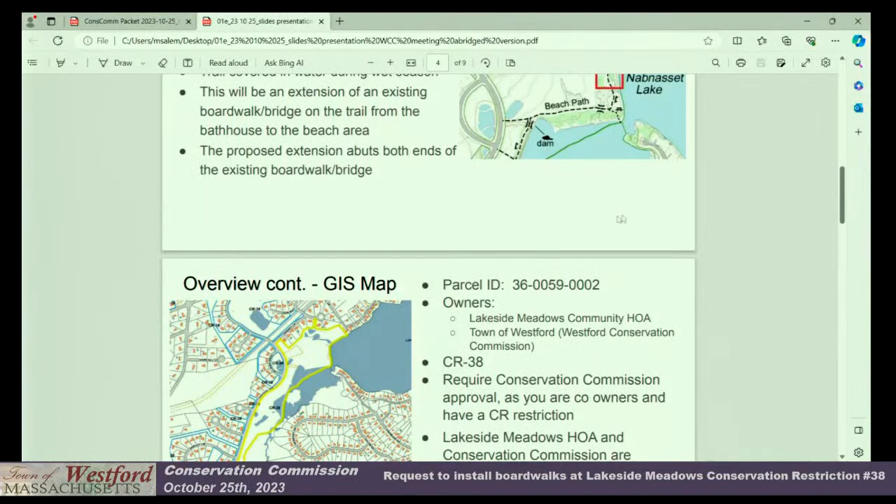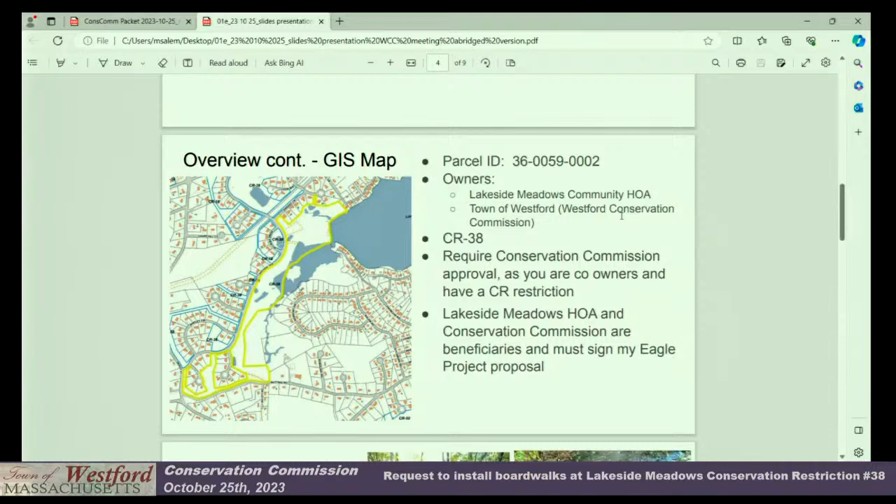Here is some information on the site. You see the parcel ID and the owners. Now I require Conservation Commission approval because you are co-owners and you have a CR restriction in place on this property. And so both yourselves and the Lakeside Meadows Homeowners Association must sign my Eagle project proposal in order for me to continue.

All right. And here's just a brief overview of the current damage to the trail. The boardwalk will help alleviate this. You can see bike ruts and footprints and other damage.

So just a brief design of the way the boardwalk is put together. So it's built on grade out of ground contact rated pressure treated lumber, 40 inches wide to satisfy those requirements regarding... why can't I think of the word? Accessibility. Yeah, accessibility requirements. Screws, and so it's designed to survive. I'm not going to go read every single thing. It's modular. It can be scaled up and down easily in the future.

The HOA has selected 110 feet of boardwalk, 108 feet if you do the math. And you can see the length of the boardwalk right here, 36 feet on the Birchwood Road side to the bridge, 72 feet from the bridge to beach.

A question that they had: the HOA desires the ability to upgrade to 300 feet in the future if they want to do that. Would it be possible to get like 300 feet signed off for the boardwalk, only build 100 feet now, and then in the near future build the next 200 feet or so afterwards? Or does it have to all be done in one go, or different permits for each expansion upgrade?

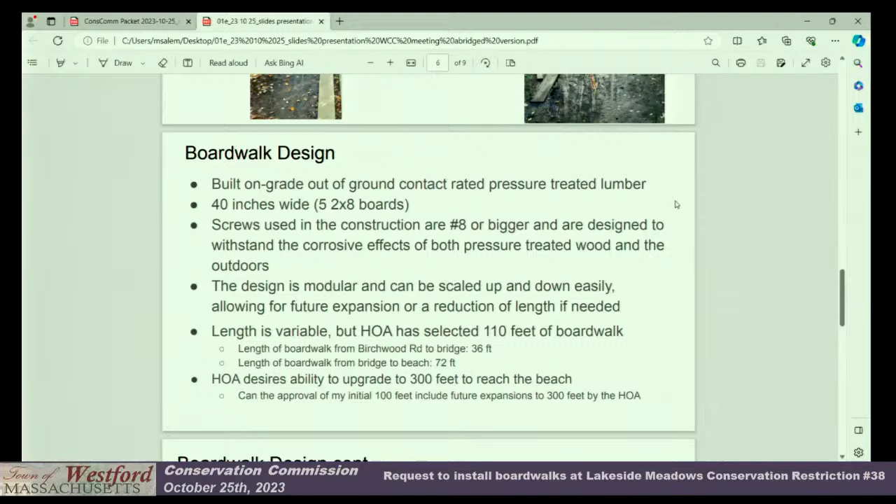I want to say we can. Let me just work through the logistics. I certainly think it should be doable. A phase one and a phase two? Yeah, and if the more southerly end of it gets expanded at a later date, we can accommodate it and make it work. Yeah. I think so, especially in terms of an order of conditions.

Again, this is kind of in a wet meadow. Not trying to avoid segmentation or anything, something like this, really? Yeah, we could, as long as it's constructed in a similar manner. Yeah. And it could be a phase two, and if it doesn't get acted upon within the validity of the order, it certainly could just be closed out. For the phase one, we could certainly issue a partial certificate of compliance for the work that was done.

We'd have the plans in with the package, and so if another scout comes in a couple of years and wants to extend another 100 feet or something, you could pass them the plans. Yep. Okay. Well, and would it actually be restricted to another scout? If the homeowners association wanted to, could somebody else? Yeah, and again, we can certainly craft an order of conditions and make sure we list appropriate parties so that, after phase one is done, the homeowners association can continue on.

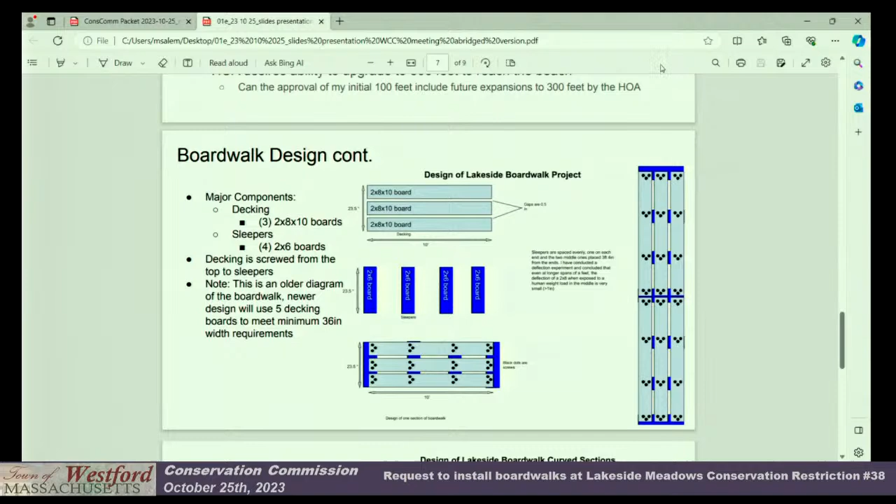Okay, so here's just another overview of the design. This is a slightly older drawing, so it uses only 3 of these 2x8x10s. The current design uses 5 of them. I just didn't update the drawing. So this just shows how the thing is put together. And yeah, I believe that's all on this slide. And then for curves, this is how it's put together. You just cut the decking at an angle.

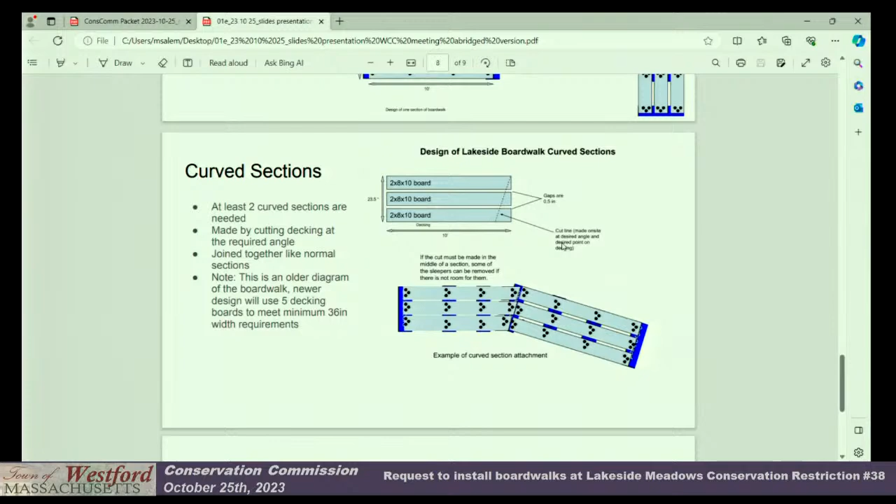One thing that I forgot to mention: these boards on the bottom, the sleepers, are 2x6s laid on their sides to screw it together and hold the whole thing rigid, and they just sit directly on grade. It's not concrete pilings. There's none of that. It just sits on grade, so minimal disturbance.

And then here's just a brief list of the next steps that I have to complete. So I've got to fill out my notice of intent. I have a conservation trust meeting, and then beyond that, it's just BSA stuff, fundraising, and then construction and handoff. So that's a brief overview timeline of what will come in the future. This conservation restriction is co-held by the commission and the Westford Conservation Trust, so that's why they're included as well, getting before their December meeting.

Do you know what chemicals are used in the pressure-treated lumber? I don't know the exact formula, but it's ground contact rated, so it won't decay. And from what I read about the lumber, it's designed in such a way that it won't leach and cause environmental disruption, so I don't foresee any problems with this chemical. That was my concern, that it's going to be washing directly into the lake, and you don't want to use anything that's harmful to the fish and wildlife there, or promotes weeds.

Is there a lot of usage of this path currently? There seems to be. Based on the slide with the damage to the mud, there must be a good number of people going through here to cause these ruts and footprints, so this will certainly clear this up. So yeah, this will be a well-used thing. Matt, do you have anything? I have nothing further. Do members of the audience have any comments or questions on this project?

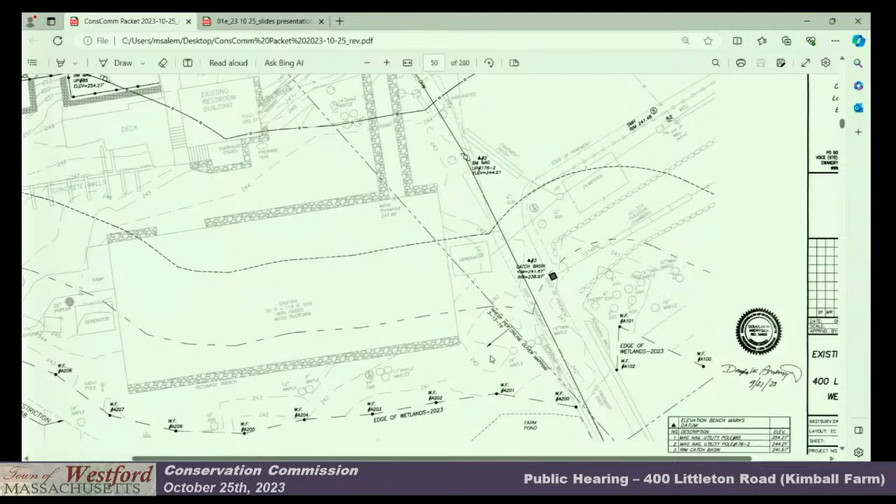BVW is located on site. It was flagged by our office in summer 2023, and then we completed a survey shortly after that was done. Matt, if you could just pan to this, this is the proposed project here. What they're looking to do is reconstruct the existing floor of the first floor of the arcade, and then build additional arcade space in front of it here. Propose another restroom facility to the left of it, and then formalize this sawmill museum. This sawmill museum isn't really habitable space. It's basically meant to put a roof over the equipment and then have plexiglass in front of it so that people may observe.

So to mention that the front portion of the arcade is going to be 1 floor. The rear portion is going to be 2 floors, first floor being arcade, where it exists now, and then a second floor that is an assembly space function room. And then off of that function room, there's going to be 2 decks proposed to the left and right. As part of this project, we'll have to reconfigure some of the access to the building, that being a handicap ramp in the front with a stairwell, as well as this side entrance here. This is where the bumper boat facility is, so there has to be a reconstructed walkway there to give us egress to the first floor.

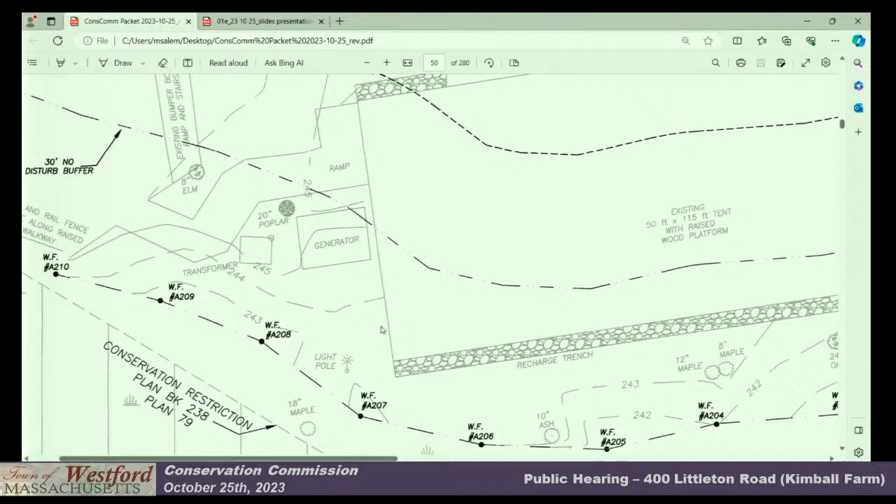So when we were talking about the deck earlier in that location, it's a second-story deck with a couple of sonotubes that's over this area. These utilities are being relocated. And then this area outside of the walkway reconstruction is going to be naturalized. That area actually gets a little bit of sunlight, so you'll probably get some vegetation growth there. Okay.

So on the proposed plan, where it talks about loam and seed, I'm assuming that's not intended to become manicured lawn? Not lawn, correct. If the commission would like to see us spread some wetland seed mix back there, we're open to that as well. Essentially, once construction's done, the only activity that will happen would be any routine maintenance associated with the drip edge that's there. So that's just leaf removal for the 2-foot trench. Okay.

Go ahead, Noel. So could you tell me a little bit about what's there currently? There's a tent, it says, I think it precedes the act, is that correct? Yeah, so in the description within the filing, there was one sentence that says it precedes the local bylaw. I don't find that to be accurate. Matt had brought attention to that today. I don't know the exact history of how the tent ended up in that location. I just know that there was a notice of intent that was filed after the tent was already up.

So the existing condition, what we're trying to maintain is the setback distance from the tent to any part of the proposed structure. So we have 10.3 feet from the edge of the tent now, and we have 10.3 from the second story overhang, the deck, if you will, and then the corner of the new structure. Okay. And how's the tent secured now? It's on sonotubes, and they have anchors, so there's like string lines and anchors holding it down. It's a circus tent, if you will. Sure, okay.

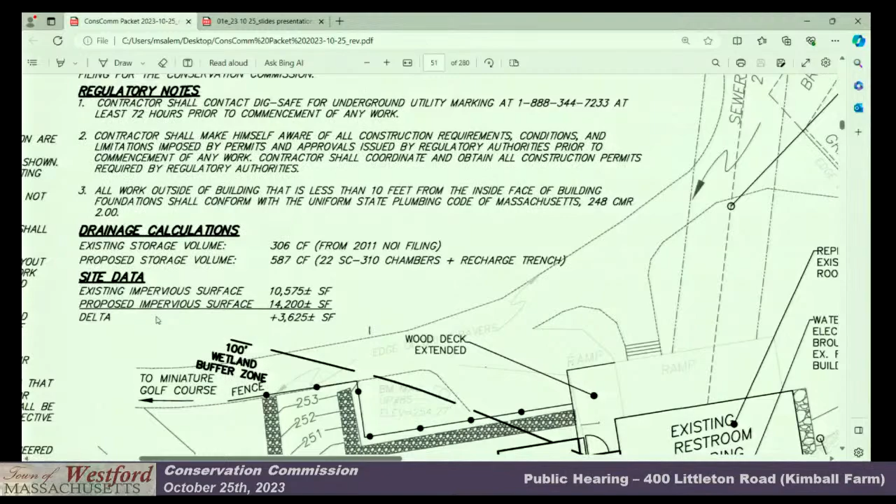Under site data, the existing impervious is 10,575 square feet. Proposed impervious is 14,200, for a net increase of 3,625. Now, that 3,625 is predominantly away from the wetlands, because our additions are at the front of the building for the expanded lobby of the arcade, and then the infill of the restroom, from the existing restroom building to where the existing tent is.

But the stormwater recharge that you're talking about, that applies to both construction in the buffer and outside the buffer? It does. So as I was describing, the only practice that we're maintaining out there is the drip edge at the rear. So we're not proposing to really try to do any work on that backside. And then on the front half of the main portion of the structure, which is the big rectangle, plus all of the other roof, the roof over the sawmill, the roof over the lobby, as well as the roof over the existing bathrooms, are gonna be directed via downspouts and gutters to the underground system.

Roof over the decks too, right? I see roof drains on. Yes, the roof over the decks, correct. Are those decks going to be like decking so that there's spaces between, so that there would be some water falling through the decks? Exactly. They are covered by a roof and then guttered, but anything that splashes back or whatnot would fall through. Any horizontal rain? Yes, exactly, wind blown rain. Okay.

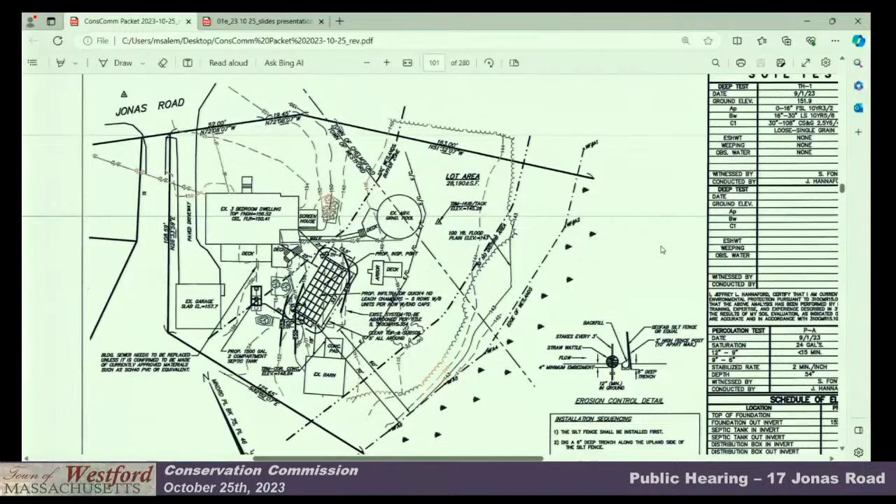So in looking at it, based on where the plumbing comes out and the change in topography, we felt that this was the only suitable area that we could work in. It does look like there's room in the front, but there is a water line. Would have to be 10 feet off the water line. So we'd be starting the system in the front center of the house, about where the front entrance is, and then going to the right.

But the problem with that is that's up quite a bit higher than the rear yard. And because of the finished basement and where the plumbing is coming out the back, the only way to get it around to the front would have to put in a pump chamber, pump it down the hill and then back up the hill around to the other side. The other problem is you can see the topography on the front. It's pretty much a mirror of what's going on in the back. From the front steps going down towards the pool, it drops about 6 feet.

So we'd be trying to build a leach field on that slope, which would create a problem in having to fill further down into the rear yard to create a level spot that we could work in. So considering the existing leach field is actually closer to the wet than what we're proposing, we feel that the two-compartment tank is a better treatment of the sewage, and we're using an innovative alternative type leach field and moving it maybe 10 to 15 feet further away from the wetlands than it is now, depending on which end you measure from.

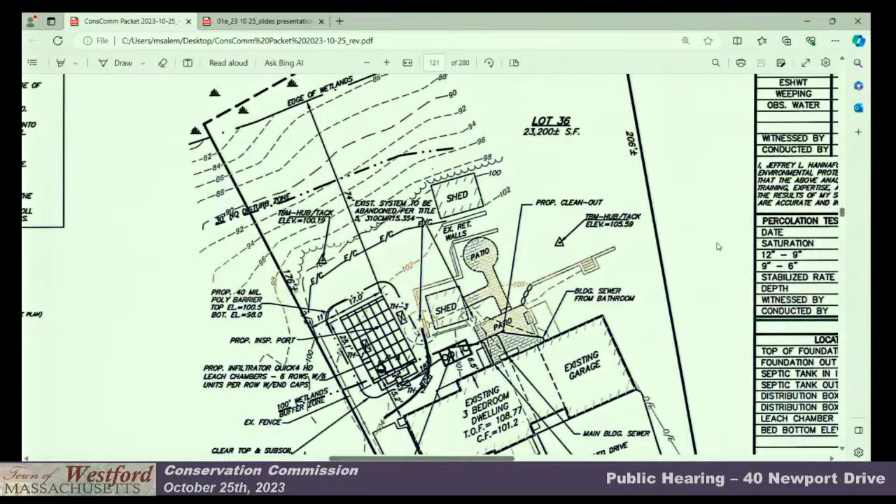So that's going to have to be pumped and filled in place in order to abandon it because of its location. So we're going to put in a new septic tank between the house and that shed. The existing leaching area is a deep leach pit just to the left of that shed. It's circular, as you can see. Again, that would have to be pumped and part of it filled in. The other part that's within 5 feet of the new leach field would get removed and replaced with Title V sand. These are great soil conditions, all good coarse sand or sand and gravel. And because of the difference in height between the wetlands in this area, we're well above the water table.

So that presents a situation where we know we're going to get good treatment from the bottom, from that effluent going down from the bottom of the leach field. But we did try to maximize to the best of our ability the distance. It's about 74 feet from the wetlands to the nearest corner.

Fortunately, the way this house is built, the highest portion of the lot is up at the street. The back is not a walkout, but there's about 3 or 4 feet of foundation exposed in the rear, which means the cellar floor is only about 3 or 4 feet below grade. So because of that, we're able to move the leach field closer. The setback required for a cellar wall is 20 feet, but the setback to a slab is 10 feet.

So what we have here actually is, because of the difference in grade from front to back, that leach field will actually be just below the basement floor in elevation. So in that scenario, the basement floor is acting like a slab to the leach field. So we only have a 10-foot setback requirement.

We moved both recharge systems outside of the critical root zone of these trees, and found that the grading in this part of the site is not just a function of the stormwater system. It's really driven by the grading within the driveway. It all leads back to the underground septic system, which sets the grade in the parking lot, which we then have to tie back out to the existing roadway and driveway to the office building off the property. We're actually raising the grade in the driveway 2 to 3 feet; off the curbing it's a little less, probably 18 inches to 2.5 feet at most.

What that means is we can really only save one tree by moving the stormwater system closer to the wetland area. What this move would also do is have us working within the 50-foot buffer zone with some grading off the end of the system here. So unfortunately, even if we move the stormwater system over, we're still going to lose these four trees.

So if you could go to sheet number 3. What we're proposing to do is leave the stormwater system as designed, unfortunately lose these four trees, but we're proposing a series of new trees to be planted, some of them along the 50-foot buffer zone. When we had presented this to planning, they had commented that still within the buffer zone, if we could plant a couple along the front of the property, if there's an opportunity to plant one or two along the driveway to present more as a street tree as well.

So I believe what this proposal is showing is to remove four trees and plant a total of 13 trees in this part of the site here, as mitigation for the removal of the existing trees. Which kind of leads me to my next point. I unfortunately wasn't at the site walk, but in speaking with Bert Corey from my office, who was there and who had discussions with Matt, the need for a landscape plan came up, not only from conservation, but as well as planning.

So what we're going to do is incorporate these plantings here, the renaturalization areas, as well as some of the other plantings that planning had talked about during the site walk, into an overall site landscape plan that's going to be submitted to both planning and to the commission here. We're working on that now. We had just got authorization from the owner today, so we're going to get moving on that as soon as possible, and as soon as we have that plan, it will be submitted.

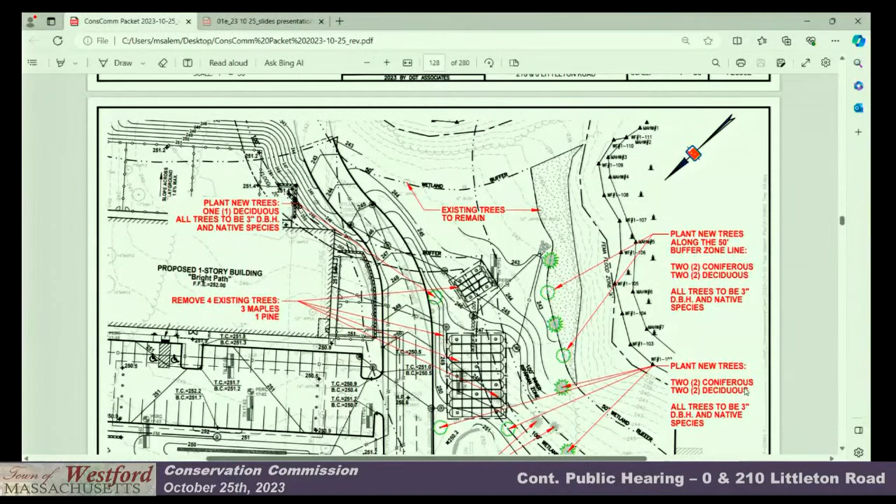Matt, I think for the record, since this is recorded. I attended. No members of the commission were actually there. Just Matt, I believe. I wasn't there either. Okay, well, just because we're live on TV and there will be minutes, it's important to be accurate.

Okay. So with that area inside the 50-foot, you're talking landscape plans, because originally, I think the first time there was talk about that being more of a natural meadow, maybe mowed once a year. Correct, so that's going to all be spelled out on the landscape plan as well. Seed mix, maintenance mowings, it's probably mowing once a year, just to keep the woody overgrowth down and promote more of a natural area. And outside that area, is it grass as well, or is that actually shrubs, trees, natural vegetation between that area and the wetlands? It is all natural shrubs and trees between this area and the wetland, yes.

So this area in this little stippled area is now just maintained lawn today. It's actually mowed lawn space today. So we're proposing to no longer mow that as a regular lawn and plant it. Yeah, and I guess the question that I have is why would we want that to revegetate to trees, shrubs, et cetera, rather than, if it's not going to be maintained lawn, is there a reason to keep it meadow-like vegetation versus let it become woodland?

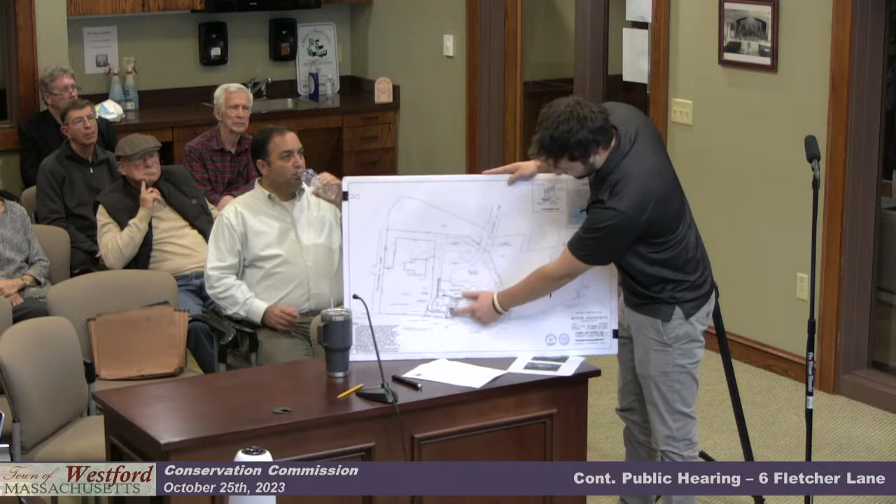I am the representative here for 6 Fletcher Lane. Just a quick overview of the project since last time. It is for the replacement of this patio section here and the walkways. The new patio section is going to include a spa as well as an outdoor kitchen. Additionally, it is for the removal of an invasive species plant bed to be replaced with native species, roughly 200 square feet of plantings proposed in that area.

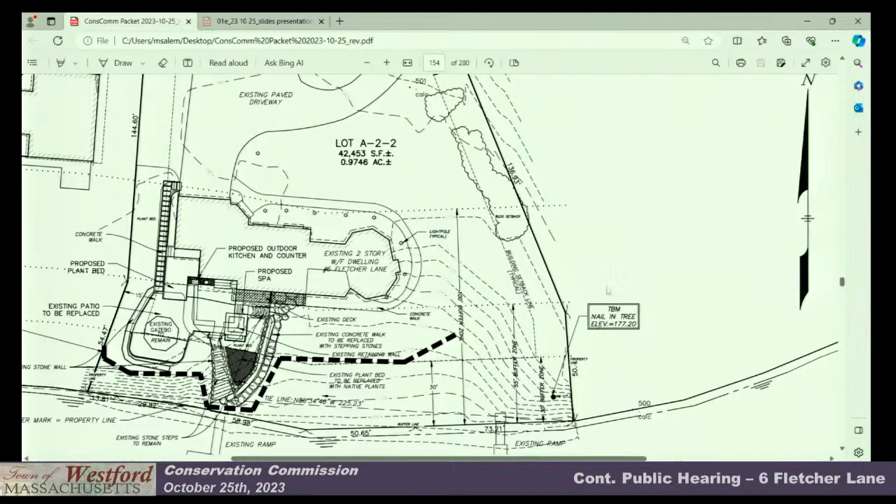Since last time, the main change was we changed the siltation barrier to straw bales with a fence behind. I wanted to make a couple clarifications from last time. On the southwest corner, right down here, there are plants. They are invasives that just popped up. That's why they've been trimming them down so they don't get out of control. There was also a bit of worry about runoff. The client told me that the perimeter of the dwelling has gravel with a drip edge, so the runoff from the house is semi-controlled.

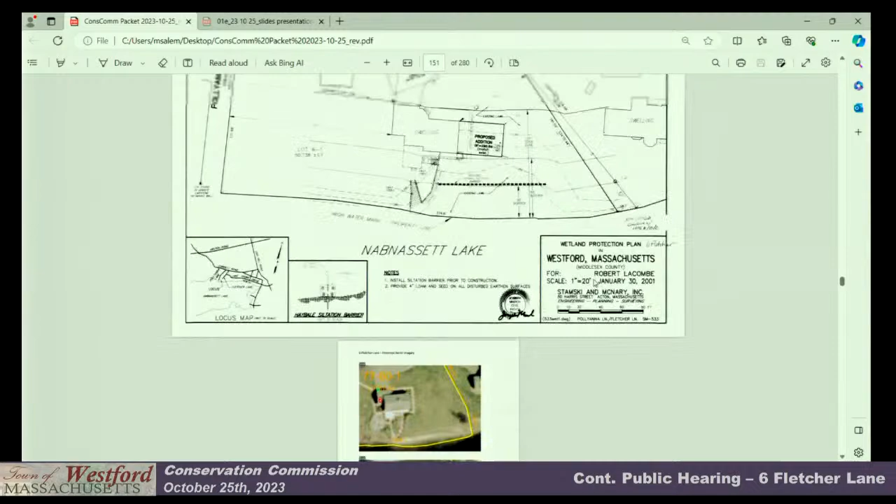Additionally, the gazebo was not necessarily on the initial permit. It was not there in 2001, but the patio was, and in 2005 it was there. I also found, and sent to Matthew, that in 2003 the gazebo was also there. The certificate of compliance was closed out in 2003.

So I would say that, if the site walk was done, there was some knowledge about the gazebo, even though it may not have been expressly talked about in any recorded legal document. It was there around the same time the certificate of compliance was closed out, so it probably was known about, and it's been there for 20 years now. The current owner wasn't aware of anything wrong with it. He just bought the house, and there happened to be a nice little gazebo in the patio area.

Other than that, I'm happy to hear if the town has any additional comments or anything on it. So the only action being taken on the invasives is in that little planting bed, but not along the water's edge? Yeah, I did speak with the homeowner and the landscape architect, and they said they're more than happy to replace that area there. Basically remove the invasives and replace it with natives.

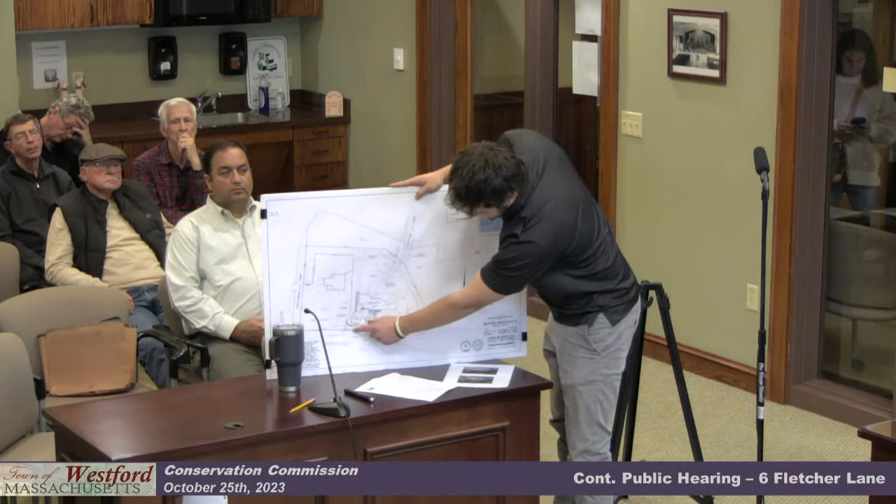You mean along the pond edge? Or? Right along, because this is where there is vegetation. Okay. So right along that area, that's where the invasives are. Okay. So they're more than happy to remove those and replace those with native plantings, because that means they no longer have to maintain it to ensure that those invasives don't get out of control. They can just have those natives there and happy.

I think I'll speak only for myself. I would like to see the invasive removed and replaced with a native vegetation, because then you also don't have a future homeowner potentially deciding to use pesticides on them. So. Sure. Yeah. Okay. Sure.

What's the name of the native plant trust or something? Yeah, it's the Native Plant Trust. When the landscape plan, I think it's to be provided later, I think there is a condition. But that ought to be your source, the Native Plant Trust. Yeah, I use that all the time. They're great. I send that to all my clients, that big list. I feel like that's the easiest to look at. Mm-hmm.

Matt, any other questions? No. Are there any comments or questions from members of the audience? Okay. So, there were also orders of conditions in our packet. Have people had a chance to review them? Yes. Okay. Any comments or questions? Or actually, are there any modifications or changes?

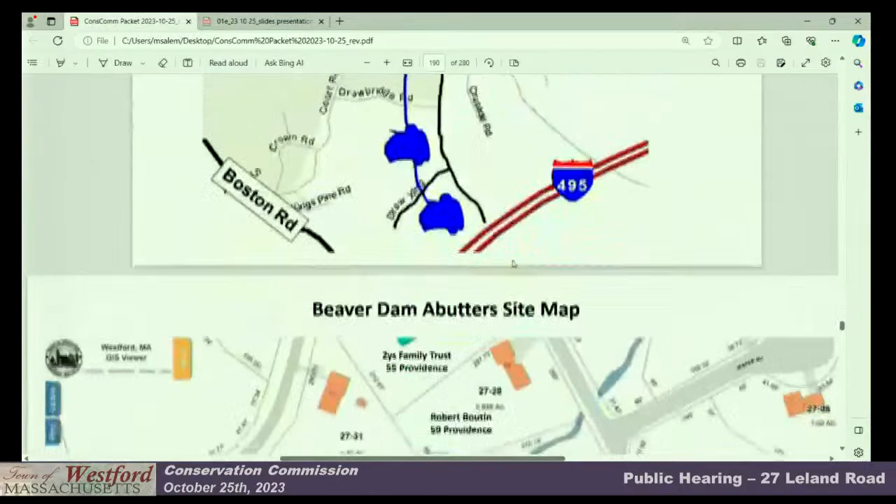We went out, the area, it's a shallow marsh, is associated with the Tadmuck Brook. There are a lot of resource areas in this area. It's a large, shallow marsh. There's bordering vegetated wetland. There's a 100-year floodplain. It does have a flood study done by FEMA. There's a floodway associated with Tadmuck Brook. There's a river associated with Tadmuck Brook. But we're not in a Natural Heritage Endangered Species Program habitat area, and there's no certified vernal pools within about 500 to 800 feet. There are some further north, but not near us.

The water level control device is basically a permanent water bypass. It's installed in the dam, and there's a little insert so that the water stays buried and the beavers can't quite figure out how the water's draining, and it allows the water levels to be maintained as they would normally be. It's currently flooding the Kester's house, and we've submitted some pictures.

And here's an example. That's a good example of the beaver deceiver. You can see the dam, thank you, Matt, is on the right-hand side. The pipe lays down under the water, and then the inlet is about 40 feet away with a screen to keep the wildlife out, the beavers, and then it helps maintain the water levels.

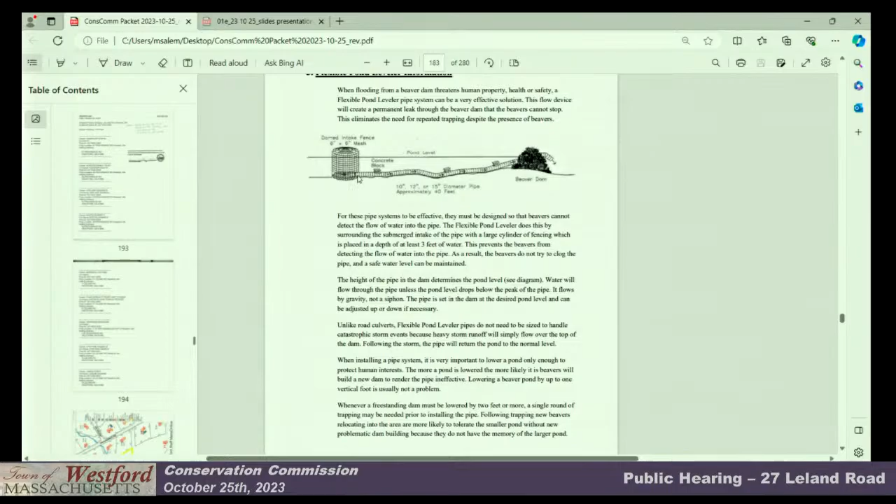The flood study for this area kind of ends right at this brook. And just above on the screen, you can see this is the profile from the flood study. The base flood elevation is about 228, 227.8. They don't give you, of course, a water level, but they give you the 10-year storm. So we came in just under the 10-year storm at 225 for an estimated height of the wetland.

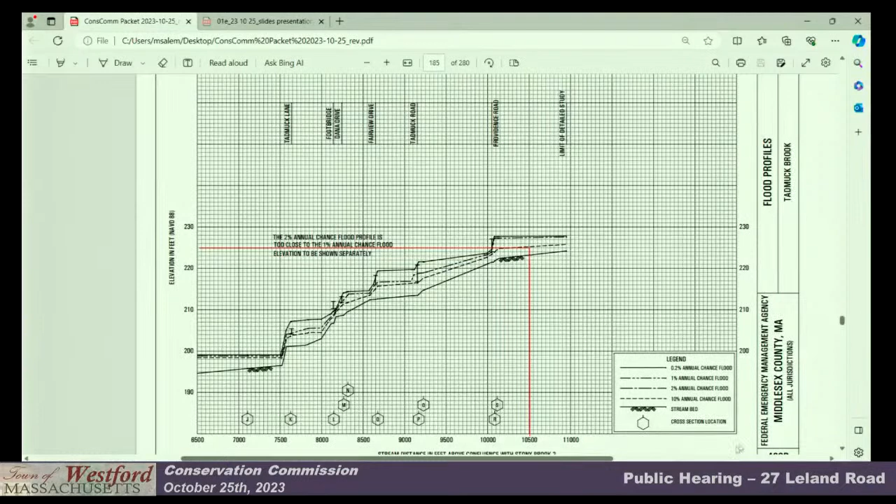Obviously, if we get permission and this was to be installed, they would be working with the manufacturer of the beaver deceiver who's licensed with installing this technology. And there would be minor adjustments made for that water level. But right now, based on the profile, we're anticipating to put it just below that 10-year storm event at elevation 225. But that could get adjusted a little bit in the field.

Access would be through the Kester's property at 65 Providence Road. We don't anticipate any heavy equipment. They would be bringing this in. They'd be installing it with waders. There would obviously be some work on the dam to bring it down a little bit. We're not going to breach the dam and let it go all at once or anything like that. It would be done in conjunction with installing the water level control device, and then kind of dismantling the beaver dam to below flood elevation.

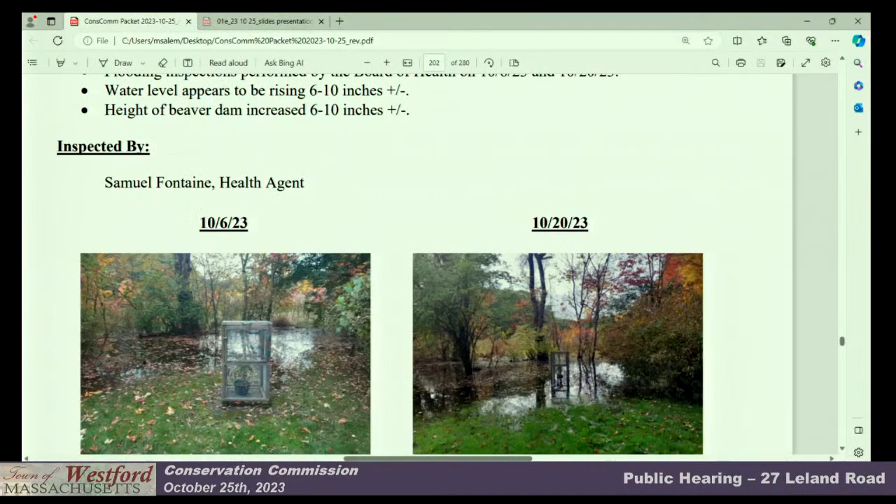Board of Health: Hayo was working with the Board of Health to try and get an emergency permit. They've done a couple inspections. I don't know if you got the email, but I put together a summary of the health agent's report, and he was out there at the beginning of October, and then a little less than a week ago, and you can see, is that a tomato plant? So there's a tomato plant that's highly guarded with deer protection there, but you can see where the water level has risen in the last 2 weeks.

That's just 2 weeks. And so the Board of Health didn't deem it an emergency just because it's not impacting the house immediately, but obviously Mr. Kester and his wife are concerned of the impacts of it continuing to creep towards the house. And we thank the Board of Health. They've been very helpful. But that photo shows it rising anywhere from 6 to 10 inches is our best guess.

And then that's the dam on the left, and it's not as good a picture. It's looking down on it. And then with the photo on the right you can visualize the dam better. And the beavers have been busy for the last couple weeks. And there is a hut out there, or a hutch. I'm not sure how to pronounce that. So there is an active den that they're living in.

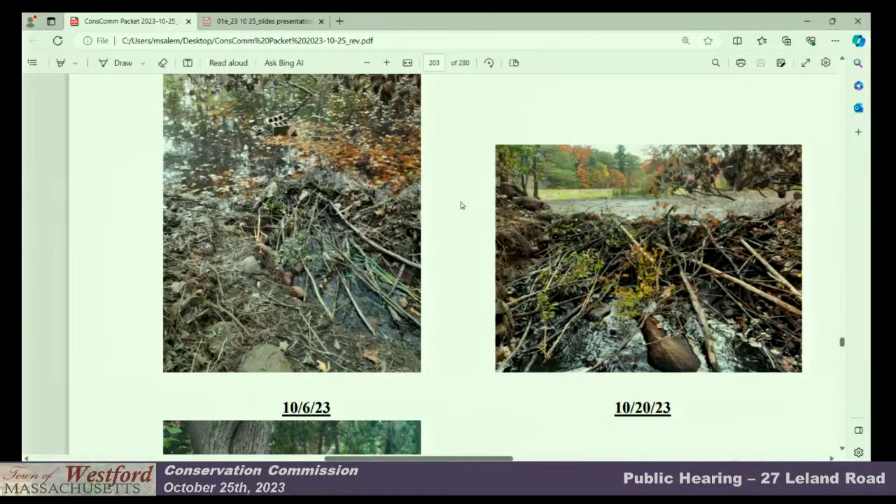So we're happy to answer any questions, I know Hayo's here. He's been putting a lot of work into this. He did a lot of work with the application. We kind of came in to help support with some of the more technical sides of the application, but he'd be happy to answer any questions as well.

Okay, Jim? Do you know who you're gonna use for doing the installation of the deceiver? Yeah. I have a proposal from, so you got a lot of stuff here.

Is it Beaver Solutions, perhaps? No. Okay. I was just gonna say, if it was. I went to Beaver Solutions first. Okay. And they're unavailable, they're busy. Oh. That's pretty much who we use. They couldn't help us this year. So Beaver Solutions recommended this firm. Oh, okay. I have to get out my glasses here to find it.

I was just gonna say, we've used Beaver Solutions in the past, and for a small fee, they'll come back every year, inspect the device, and if needed, repair or replace parts. Yeah, we've taken advantage of that several times in our properties. Yeah, Beaver Solutions is maintaining the level devices which are on both town and private property, I believe. Yes. They're still doing that, right? Yep. Yeah, they're a good outfit.

Okay. Well, I talked to them, but they're not taking on any new work. All right, well, good luck. I talked to the fellow in charge, he's a real nice guy. Callahan, Mike Callahan. Yep, that's the guy. Well, anyway, I talked to him again, but they just can't do it. They're short of personnel. Right. There's so many beavers. Beaver population has grown immensely, especially in our area. There are beavers everywhere. I think we had the Board of Health approve something not too long ago.

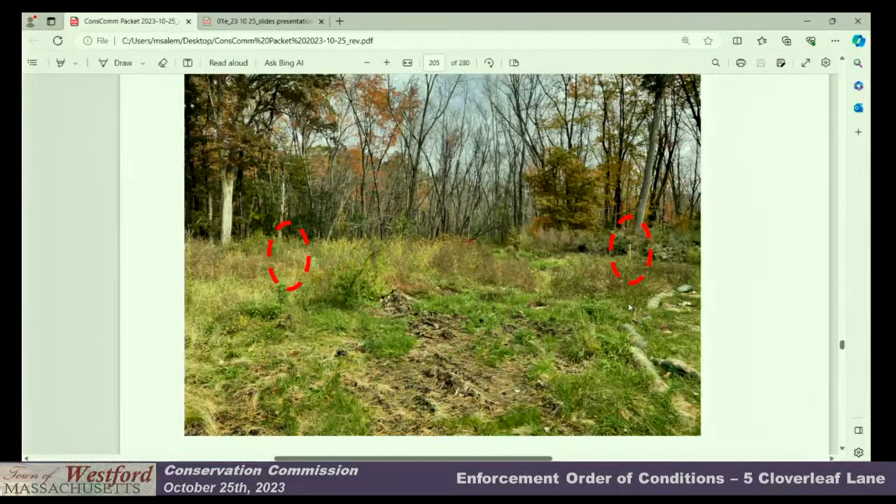Now, was the erosion control supposed to be the limit of disturbance so that the woodlands beyond that was going to be left? Yes, in this photo, the first photo, the remnants of the erosion controls and the limit of work is shown here. And so there was certainly a substantial buffer to the wetland resources; these were installed at the 50-foot limit to the wetland. And so, yes, the erosion controls were to be the limit of work. And the limit of clearing. Yeah, and the limit of clearing. But again, this was previously cleared, it's now just kind of meadow habitat.

Any members of the commission have any comments or questions? So I think with the enforcement order the intent is that to resolve the issues, we're waiting for the landscape plan that's going to go along with. Yeah, a planting plan associated with the, and I did provide the homeowner the couple links to the Native Plant Trust, Go Botany, and Weston Nurseries to kind of choose their screening, native species for screening, but also to supplement the area around the pool. Okay.

So these markers were originally what was proposed to delineate the no disturb zone as part of the subdivision development? Yes. Given what's happened, do you think those markers are sufficient, or do we need to look at augmenting them? I think the markers are sufficient. There was a deficiency in the developer providing the notice to the homeowner what these are all about in the deed, which has been rectified, and legal documents have been. Okay, so people will know going forward. Right. The remainder of the existing homeowners, it wasn't done at the time in May, but shortly thereafter in June, it had been resolved. So everybody's now aware. Okay. No comments? Okay. Any comments or questions from the audience?

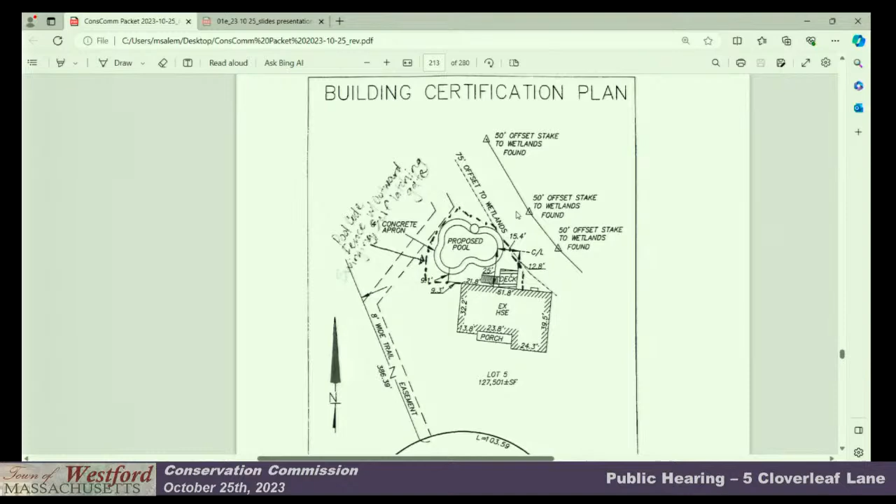In the previous photos and walking the site earlier this week, that area is actually in a depression. The area, so when you say the area? The proposed pool. Okay, it's in a low spot. Yeah, in the low spot of the site. Previously, back to the horse farm days, I imagine, something was removed, and so actually, any erosion would have to go up gradient to get to any of the wetland resources nearby. Okay. Members of the commission have any questions?

We spoke of this before the meeting, but no backwashing. It's a cartridge filter system. Correct. Okay, so no backwashing, no flooding. Okay, good. And where will the pool chemicals be kept, like chlorine tablets or whatever you're going to use? Yes, we're using a saltwater generator. Oh, it's a saltwater pool. Yes. Okay. Okay, because there's no real scale here.

One of the things I was looking at was the fence. I can't tell really how close the edge of the pool is to the edge of the trail easement. I guess I'm not having a good feel for how much space is there between the edge of the trail easement and the fence, the fence to the pool, or the edges that you're showing for the pool. When we had it surveyed, I tried to keep everything within the 75, because the 100-foot goes straight through my house.

Yeah, no, the trail easement, I think. I'm just kind of wondering, that all looks really close together, and so I'm trying to, I don't know whether there's 10 feet between the edge of the pool outline and the easement, or whether it's, you know, it just.

How far would you like it to be? No, what I'm really interested in is what you're looking to do. So is the fence going to be right next to the trail easement? I would like it to be. It's just an easement, so in my opinion, because it's an easement, it doesn't need to meet any setbacks. You know, they could have a fence.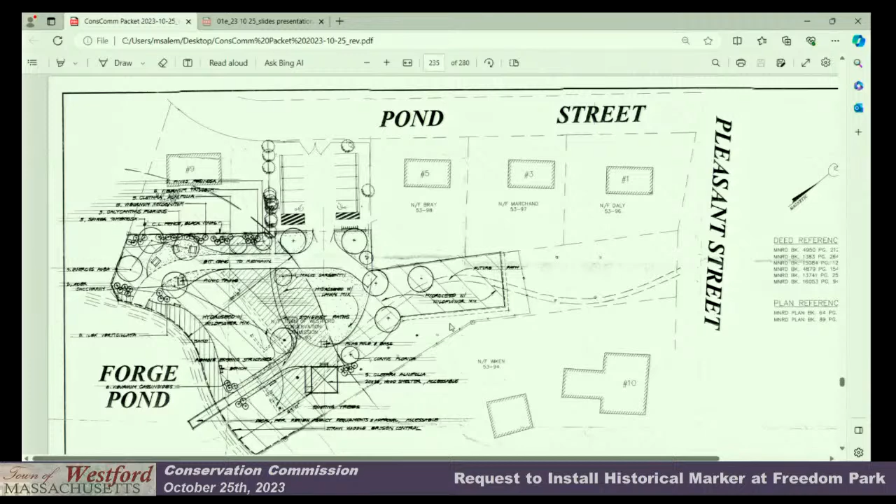So would you have that sign, because there's the parking area when you enter off of Pond Street, which is up at the top. There's Pond Street, okay? And right there is where the sign is. Okay, so it's just a sign saying Freedom Park. Yeah, Nathan, what's his name? I know the scout that did the sign. Okay, so it says Freedom Park. What I'm saying is, it's been kind of worn, that concerns me, there's been no maintenance to it over the years. But we could put something down the bottom, or make another sign that says Freedom Park at Sullivan Shore. Okay. So that the history of the area is maintained.

Okay, and actually, so design it so that it's better able to withstand the elements. Like I said, I would work with the art department at Westford Academy and try to get ideas from there, but that's something I'd like to see also. Okay.

Yeah, because in our conversation, the four of us, just to update the commission, what you see here is the plan, a two-phase plan for a project back in 2000 that was approved in 2006. Nicholas Reed did that. Yeah, and actually Paul Sterrett's signatures are on some of the plans as well. But this was what was envisioned. Parts of it got built over time. Parts of it never got completed. I don't think, Matt, you were out.

And the shrubs along the property line with number 9. Yeah, this photo is looking at 9 Pond Street, the parking lot, the fence falling down. Okay. And so the plan as envisioned in 2006 had a central lawn area, some native plantings, which they call out along that westerly property line with 9 Pond Street. They also proposed a wildflower seed mix within the buffer to act as a naturalized buffer to the water body.

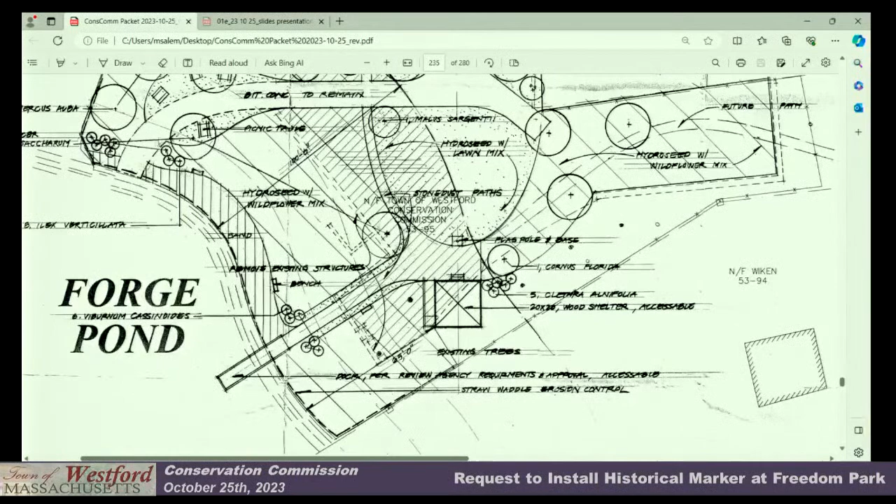Did that ever happen? Portions of it have. The fishing pier down here is located at the end of the pavement. The pavement was proposed to remain to allow accessible access down to the water. But it stops about, I don't know, 60 feet from the, yeah, it goes about halfway. And so in discussion with Mr. Hall regarding the Memorial Day services which they hold down there, having stable access to the water to lay the wreath would be a...

Well, and the other thing, looking back at the plan, there was talk about native seed mix, so that there would be a naturalized buffer between the edge of the pond and the walkway. And then there would be another area that was maintained lawn for people to congregate, stuff like that. And elements of those plans never got completed. One of the things that Matt and I had identified is if we're going to partner with the DPW to keep the area that's supposed to be mowed accessible, we need to do something that delineates where they mow and where they don't mow.

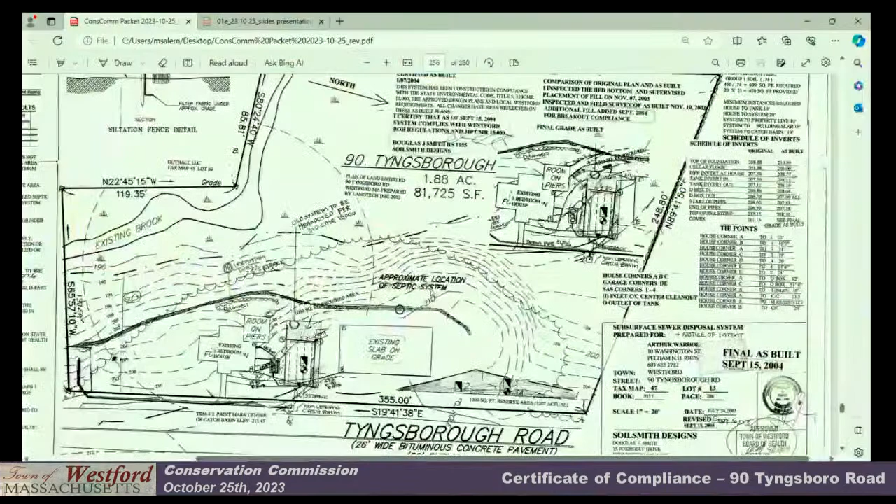Although there's been compliance with, am I correct? Yeah, so the order of conditions was for the reconstruction of a subsurface sewer disposal system. The health department files had an as-built dated September 2004, which is very helpful and shows the location of the new septic system and how it was constructed in substantial conformance with the approved plan.

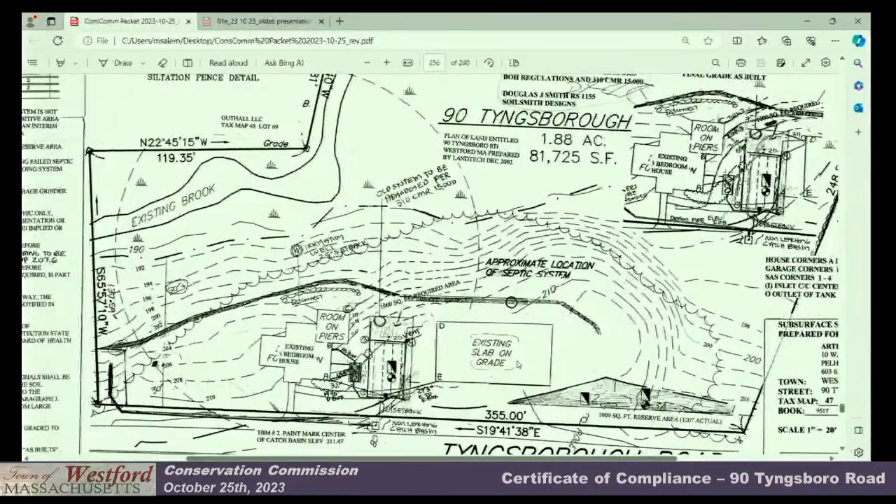In going out to the property, accumulated inorganic and organic materials were observed dumped off the northerly slope and westerly slope, tangential to Tyngsboro Road, and behind the commercial building. The materials included brick, concrete, dumped organics from over time. There was some accumulated litter, and Tyngsboro Road is a well-traveled road, so I'd be surprised if there was zero litter with its proximity to the roadway.

But there were also pieces of styrofoam, maybe granite, broken pieces of rock, concrete, maybe a 55 plastic drum container. An air compressor. So maybe it wasn't plastic, but it was certainly a foreign object. So there's some cleanup that needs to get done? Well, would the commission like to issue an enforcement order to clean up the areas on the northerly and westerly slopes in the buffer zone?

Yeah, the areas within the buffer zone, while also issuing the certificate of compliance, because the work regulated under the order, granted it's been 20 years, did pass Title V, so it's probably still in good working order. So I think issuing the certificate of compliance and an enforcement order for removal within 60 days separates the two topics. Right, and it keeps the sale moving along while also requiring the work to be done.